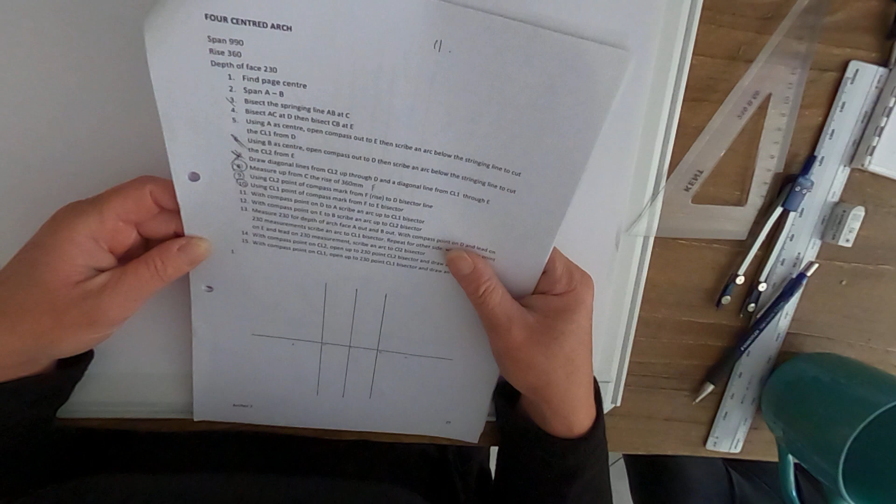4-centred arch. Now the span is 990 and the rise is 360 and the depth of the face is 230. So step 1 is find the centre of the page. So step 1, scroll a line, centre of the page 20.5,

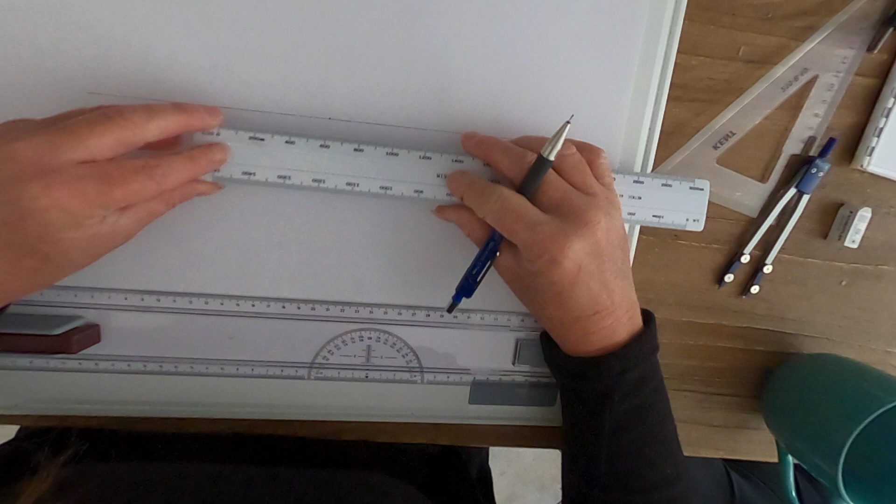find our span. So the span is 990, so A is going to be 495. So we go scale 1 to 10, 495 is A, B is 990. So we have A and B. So we now bisect our line at C. So we open our compass over halfway, scribe both. Draw your lines a little bit longer on this one because we'll need the length now.

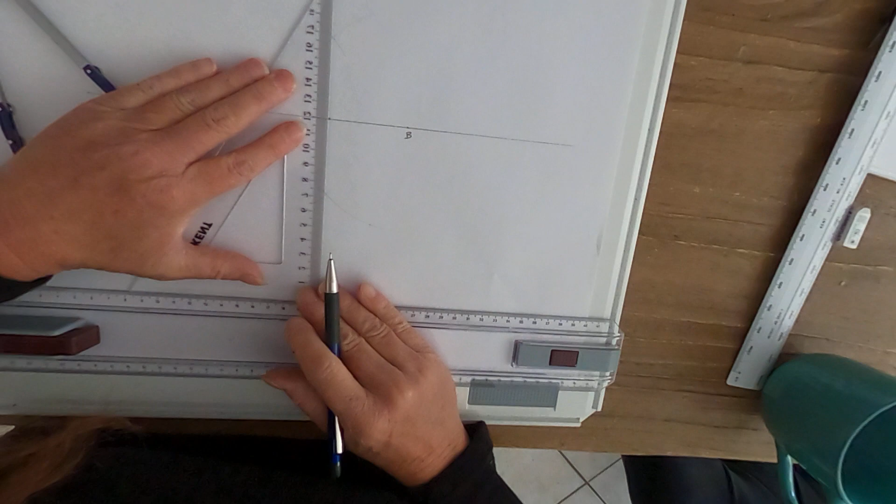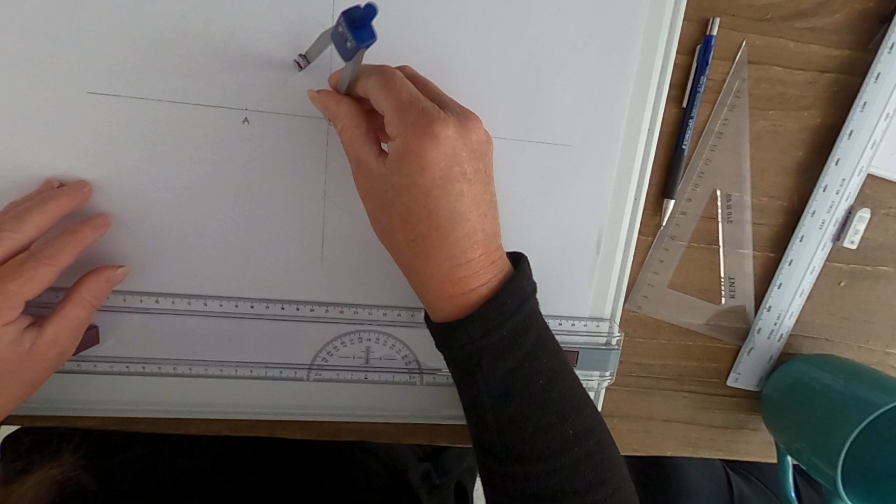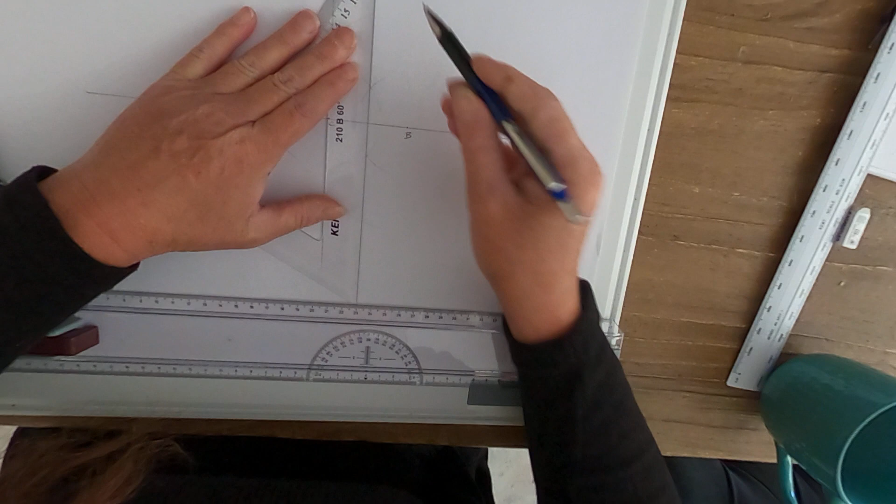Okay. Then it says bisect our lines A to C to make D and C to B to make E. So again, over halfway, we scribe our lines. There's going to be D and this is going to be E. So that is E, and now we've got D. D.

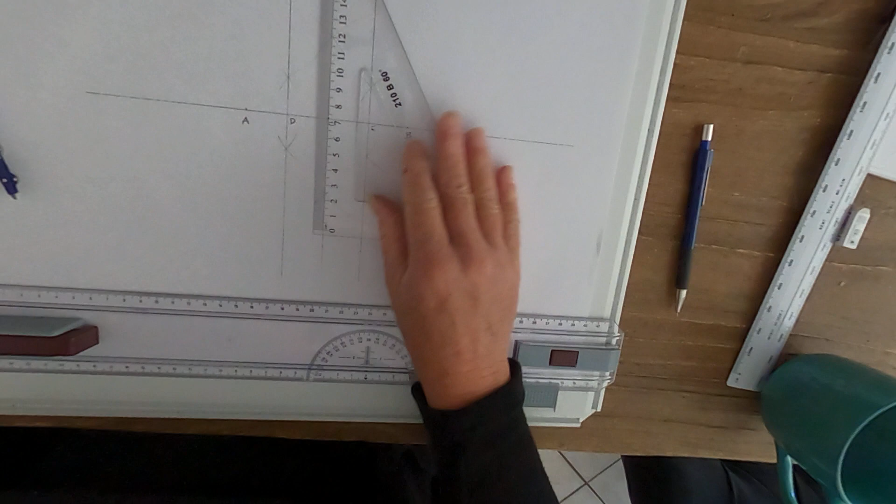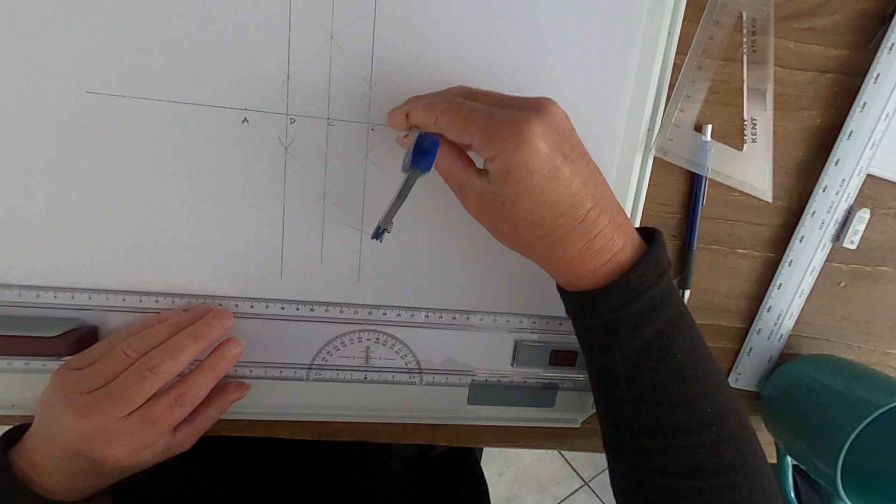And it says, using B as centre, open your compass up to D and scribe an arc below the line at E. So using B centre to D, scribe an arc below. That's centre line 2 actually. And then we go A to E, scribe along down the bottom. And that's centre line 1 and centre line 2.

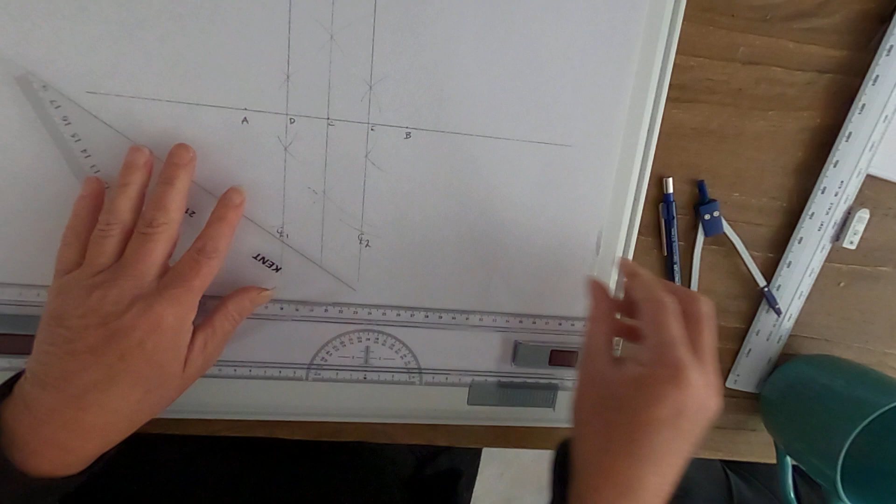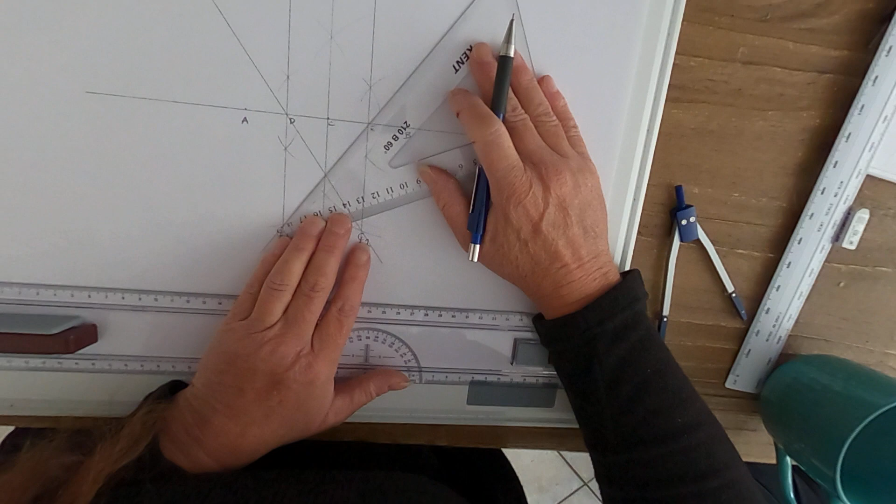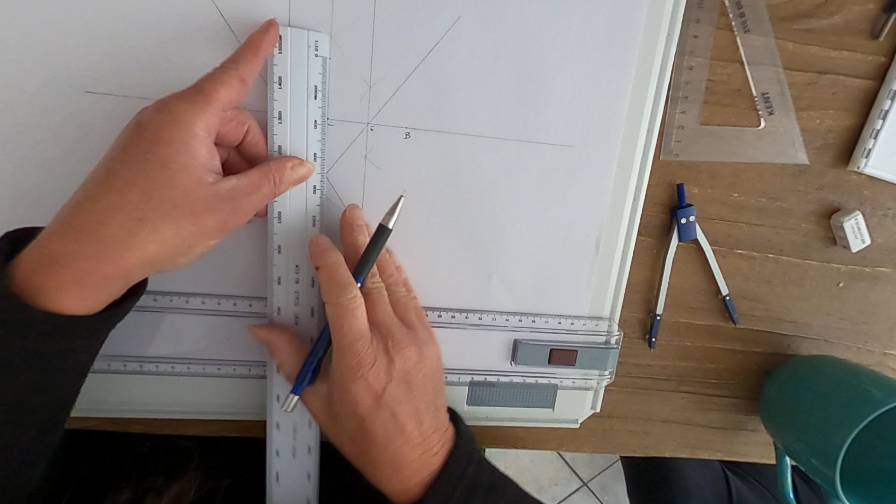Then we draw our diagonals from centre line 2 up through D. We draw a diagonal and then we do it from centre line 1 up through E. Now we're on step 8, measure up from C, our rise at 360. So 1 to 10, 360, and that is F, and that's our rise.

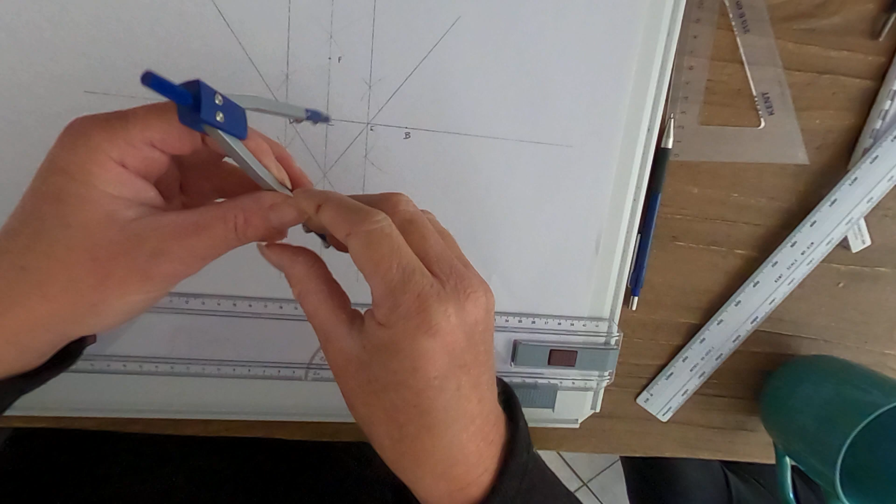Using centre point 2, open our compass up to F and we scribe our line down to our centre line 2. And then we reverse it by centre line 1 up to F and go down to centre line 1. So centre line 2 up to F and scribe a line. And then centre line 1 to F. Hang on, that one's...

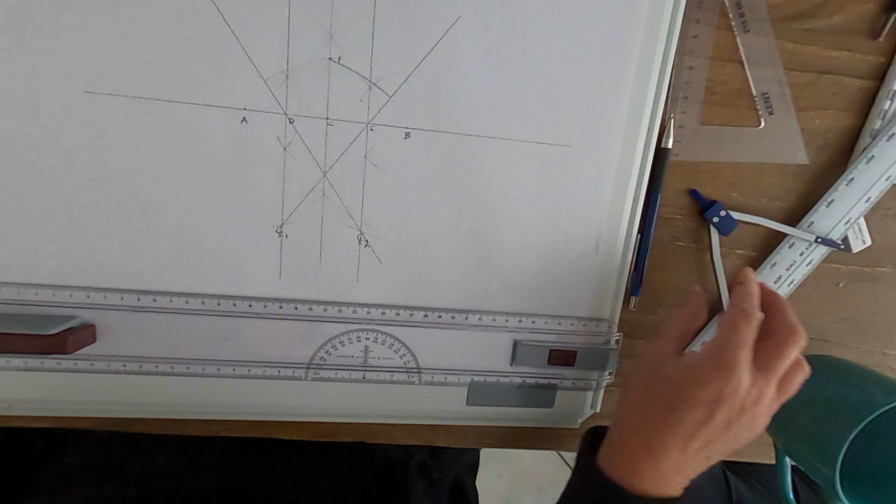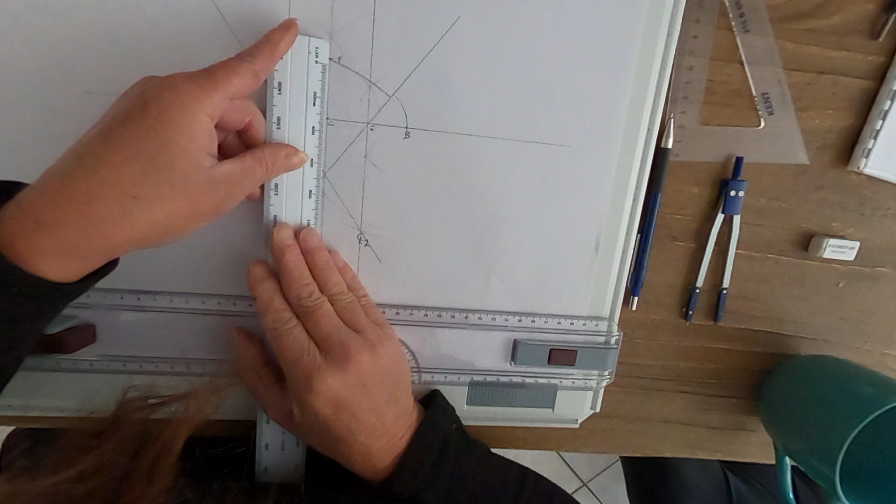Okay. Then using our compass point D to A, we scribe a line up, and then we have E to B, we scribe a line up. Now I'm noticing, I just want to see if this is 360. I'm a bit short. So you can see my lines don't marry up to my B lines, and that's because this is not exactly 360.

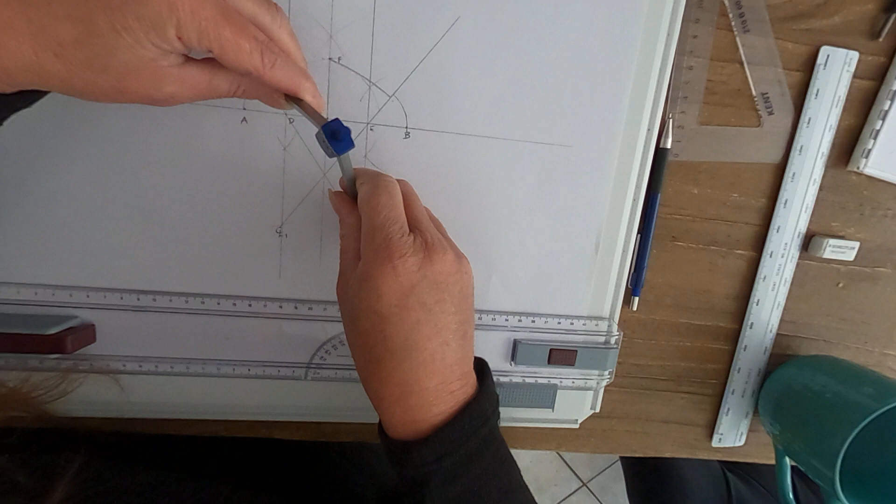So I'm going to open it up to here. Where is my point? Up to there, and just scribe my line up. That's it. That's exactly how I want it. Oh, that's this. Okay.

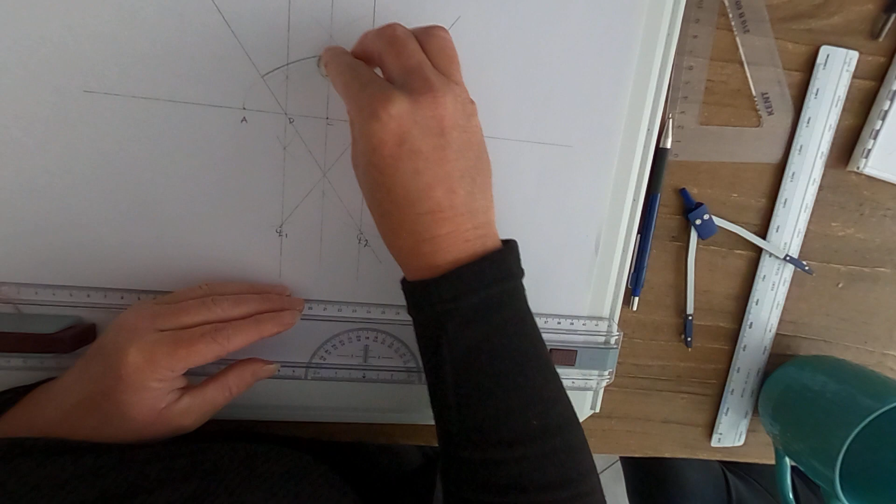So these ones here aren't exact here. And that's what you do if you make your mistakes with the measurements. So you just remark it. But never leave it bad. Never leave it so it's not lined up, because then your arch is definitely not going to be lined up. Okay.

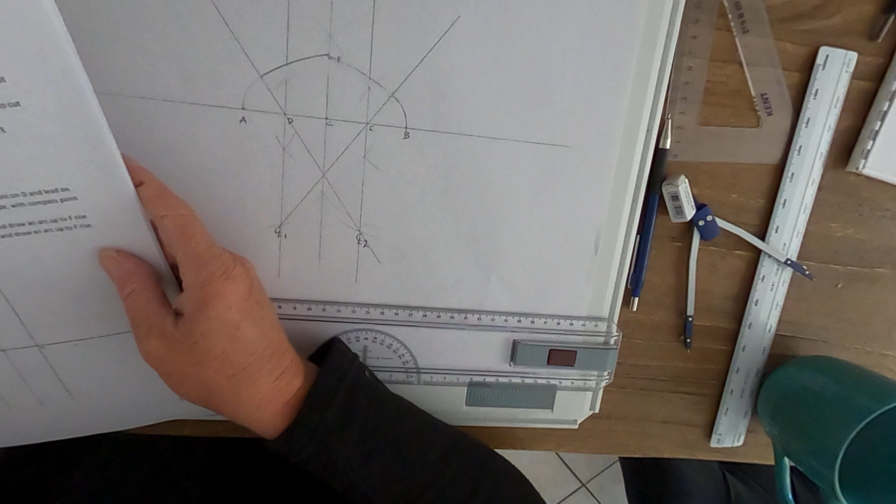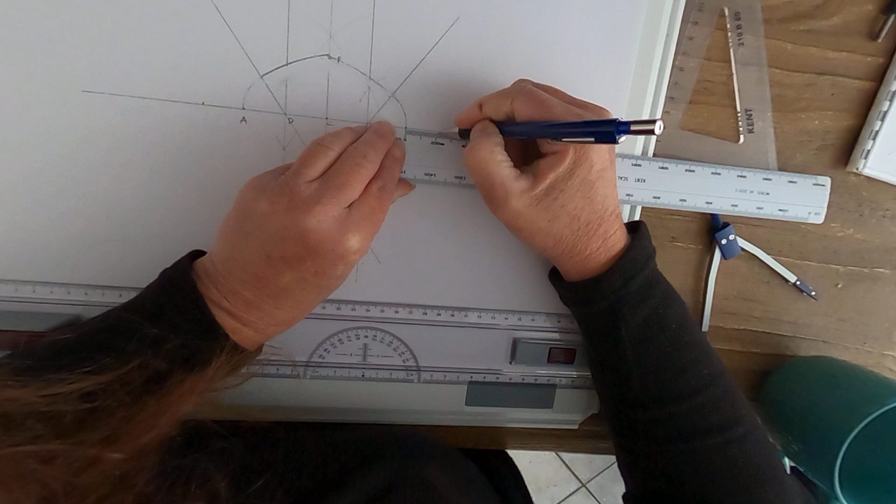Now, we've got our depth of 230. So what we'll do again is that on either side here, we'll go 230 at 1 to 10. And same as on the other on B, we'll go 230. And same with the centre here at F, I just go 230. But I don't think it's that necessary, because once we put our line here from 2, this one's come up, so I'll show you.

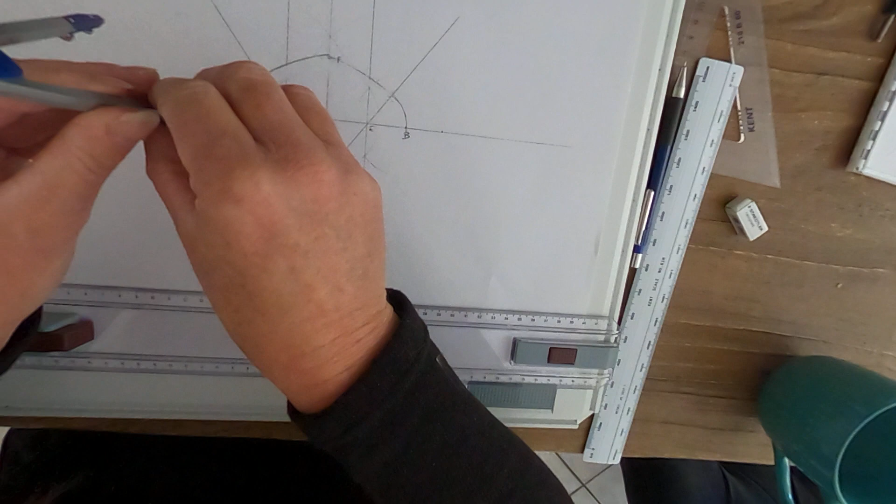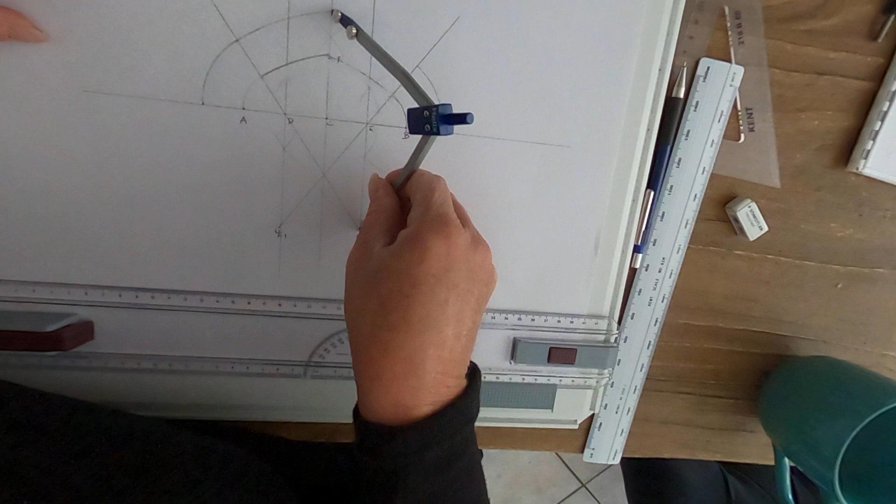If we go D, put our line on D, onto our 230 mark that we've just created, scribe up, do the other side too, from E to B. Now, what we'll do is from centre line 2, where we've always had our mark, we open it up to our mark that we've just finished, and then bring it up to our centre line, and then reverse it with centre line 1, and then up. That's how we create a 4-centred arch.